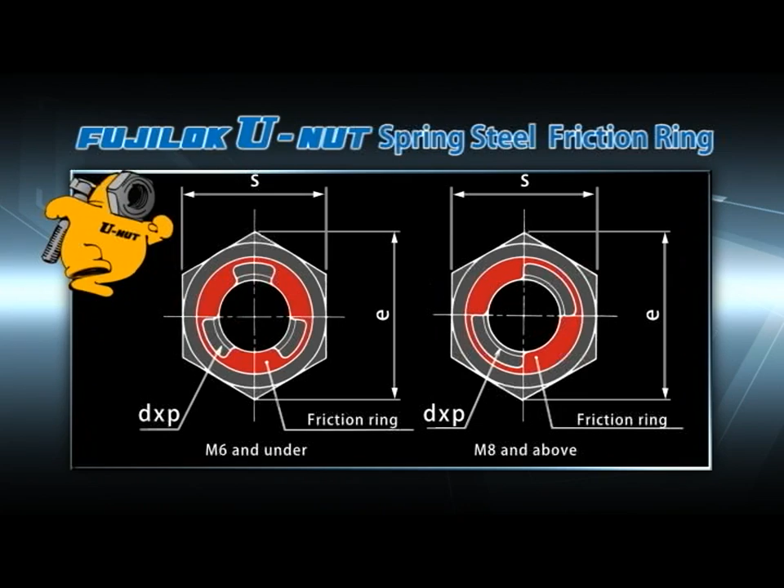And now, the basic specifications of the FUJILOK U-Nut. On sizes M4 to M6, friction rings have a 120-degree 3-wing ring structure, while sizes M8 and above have a 180-degree 2-wing ring structure. Friction rings are integrated with the top face of the nut. A wide range of sizes is available, from small diameter M4 nuts to large diameter M115 nuts.

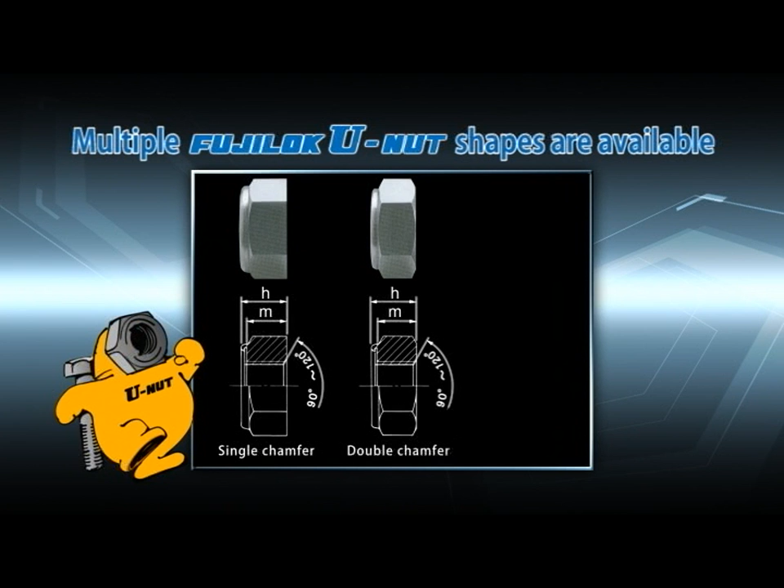In addition, thread accuracy conforms to the JIS 6H standard, and for the pitch, coarse thread as well as fine thread is available. Various shapes such as Type 1 single chamfer nuts, Type 2 double chamfer nuts, and Type 3 thin type nuts are available, as well as small nuts, flange nuts, domed nuts, weld nuts, and other specially shaped nuts.

The FUJILOK U-Nut is also produced in a wide range of materials, such as low-carbon steel and heat-treated high-carbon steel, for conformity with all manner of bolts. Various surface treatments are available as well, in accordance with the customer's intended use and specifications.

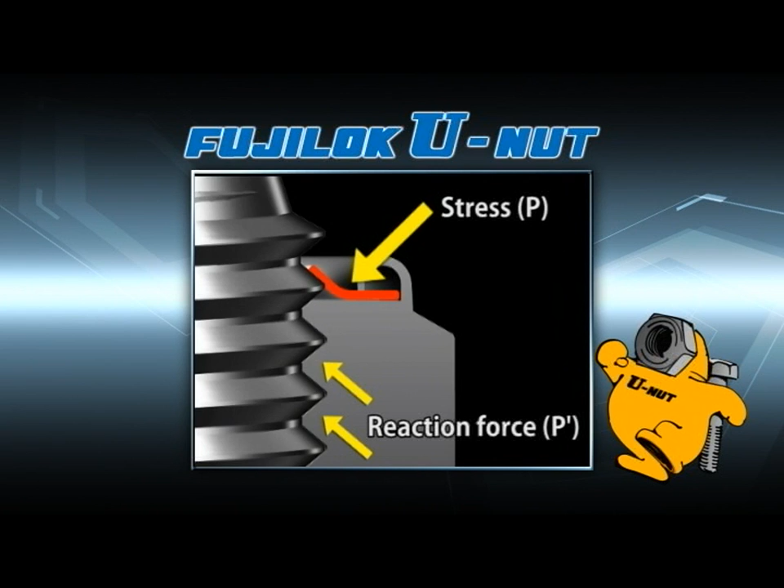Now let's look at experimental data that shows the excellent performance of the FUJILOK U-Nut. First, we'll measure the frictional torque, called the prevailing torque, that is produced by the FUJILOK U-Nut friction ring strongly placing stress against the bolt screw threads through a spring effect. As shown in this graph, prevailing torque increases as the nominal diameter of the nut increases.

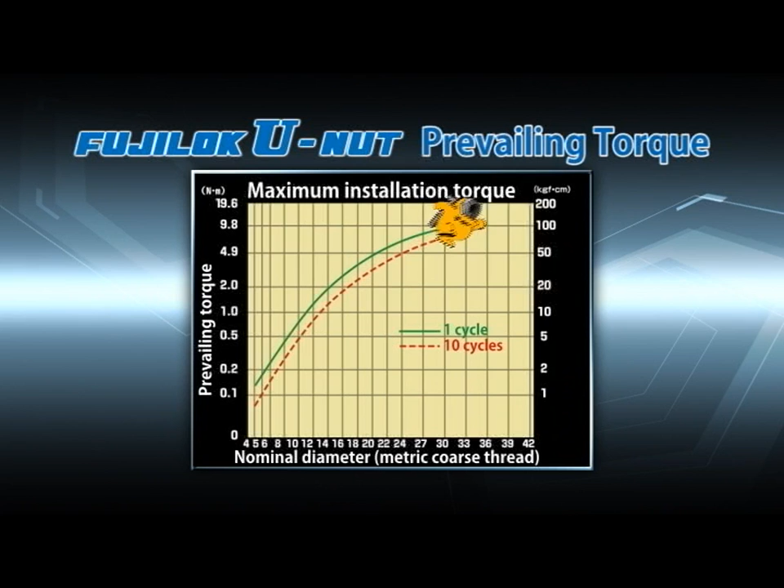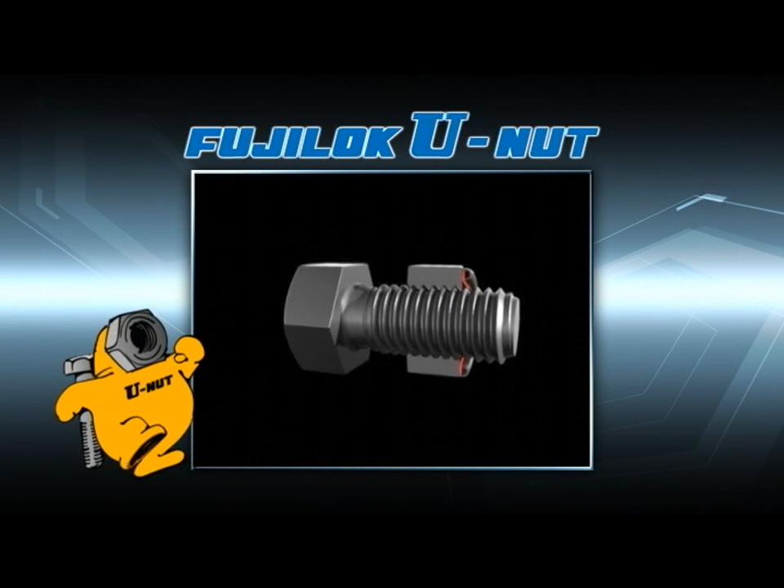Even if nut removal and installation are repeated for 10 cycles, the prevailing torque is hardly reduced. By looking at this, you can see how free rotation is prevented through stable prevailing torque and how the FUJILOK U-Nut can withstand repeated use. Excellent!

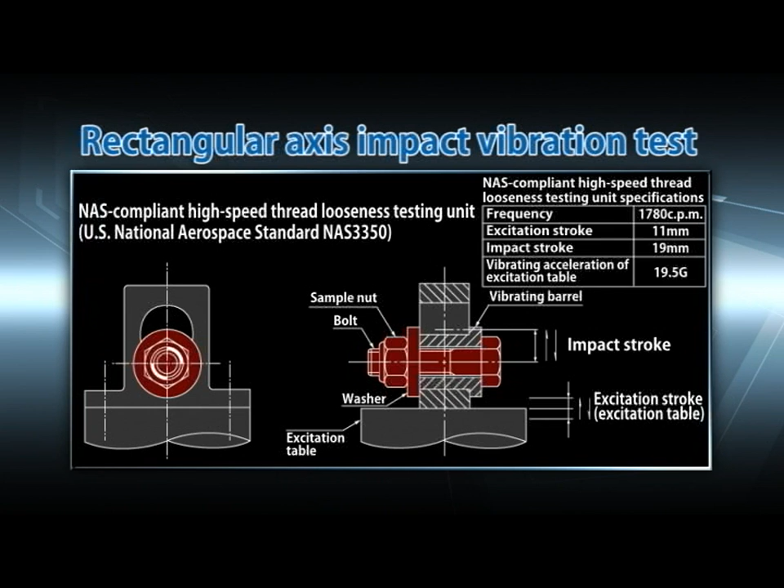Next, let's look at an actual test video to really understand the quality of the FUJILOK U-Nut's locking function. To achieve stable test conditions, a preset type torque wrench is used, and the nuts and bolts are set on a vibrating barrel. In this test, ordinary nuts with spring washers, double nuts, and FUJILOK U-Nuts are compared.

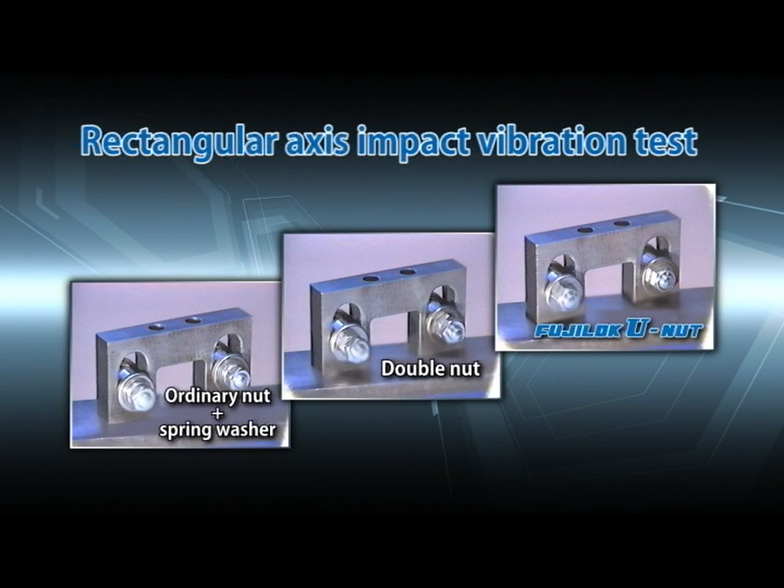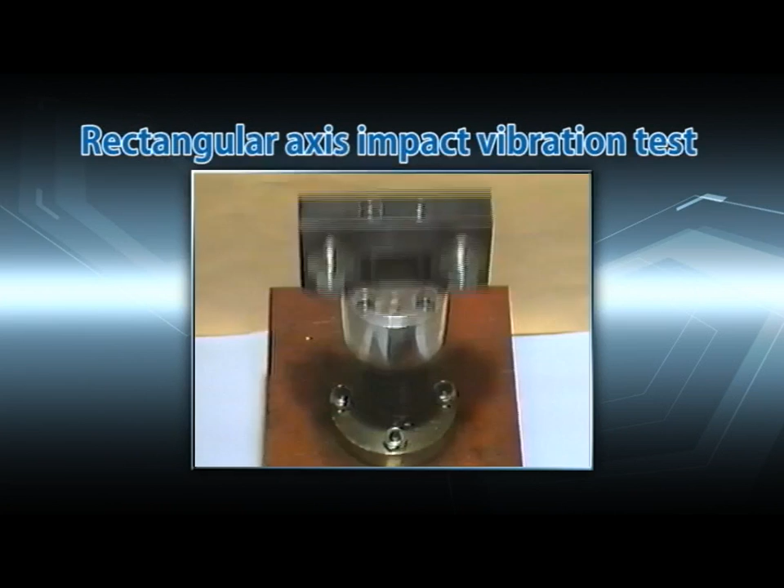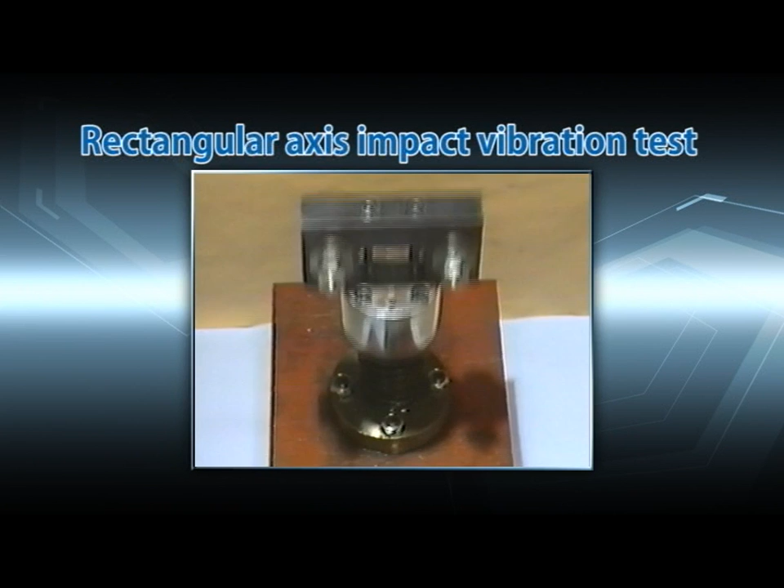As seen here, an impact vertical to the bolt axis direction is repeatedly applied to the nuts and bolts tightened in the vibrating barrel. The locking performance is then determined by looking for looseness and seeing which nuts stayed locked the longest. After 45 seconds, the ordinary nuts with spring washers have come off. After 2 minutes and 30 seconds, the double nuts have come off.

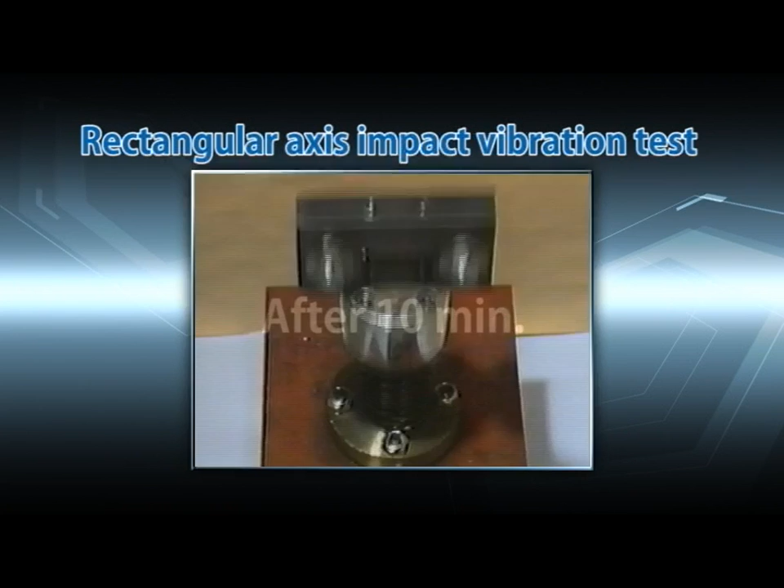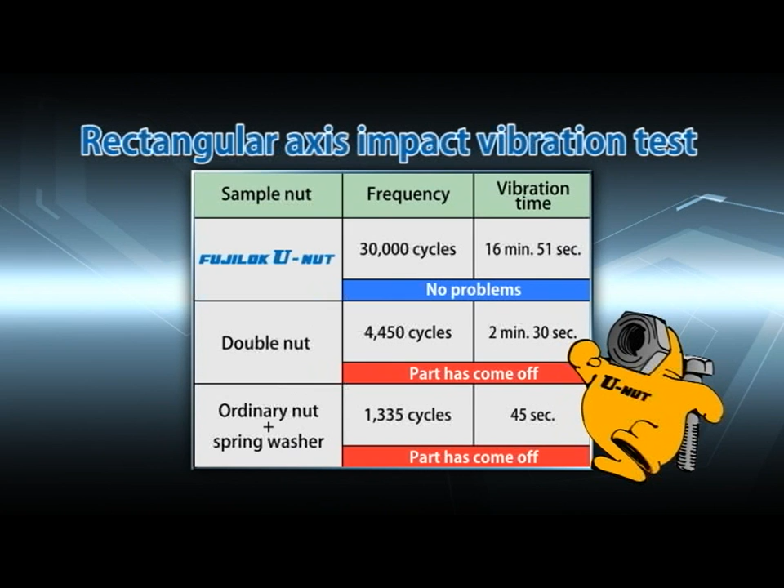In comparison, the FUJILOK U-Nuts are still okay after 10 minutes. The test results show that the FUJILOK U-Nuts maintain the locking effect even after 16 minutes. As you can see, the excellent locking performance of the FUJILOK U-Nut can also be verified with a vibration test. It's definitely the best!

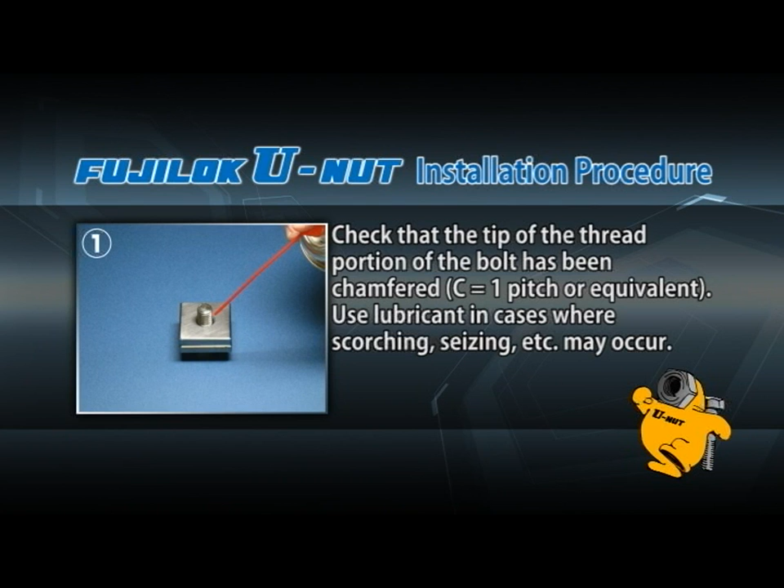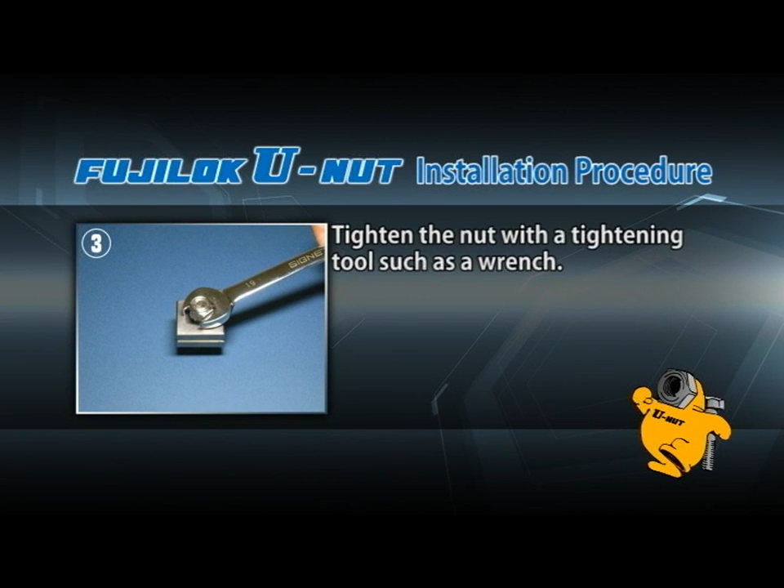Installation of the FUJILOK U-Nut is easy. Check that the tip of the thread portion of the bolt has a chamfer that is equivalent to 1 pitch. Use lubricant in cases where problems such as scorching or seizing may occur. Manually screw the nut on until the friction ring touches the tip of the threaded portion of the bolt. Tighten the nut with a tightening tool such as a wrench. Check that at least 2 full bolt threads protrude beyond the friction ring.

Lastly, we will review the precautions for using the FUJILOK U-Nut. When fastening, refer to the tightening torque table for the appropriate torque to use. Use bolts with a chamfered tip with a JIS 6G thread accuracy. Use lubricant in cases where problems such as scorching or seizing may occur during installation or removal of a nut.

For full locking, ensure that 2 full bolt threads protrude beyond the friction ring at the top of the FUJILOK U-Nut. When welding a nut, pay attention to the effect of heat and spatter on the friction ring and thread areas. Consult with Fuji before using the nut if the bolt thread is machined with keyways or pinholes.